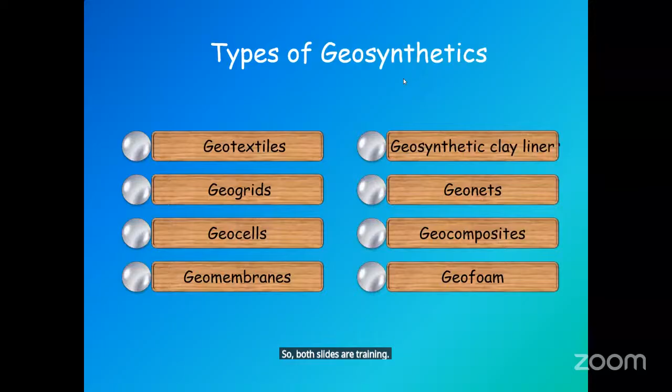Good evening, sir. Good evening, Andy. We'll start by 6 o'clock, sir. Okay, sir.

So how many are attending, sir? Total 316, sir. Out of that, I think around 250 to 275 are expecting to join, sir. That is a very good number, sir. So getting those many participants, yeah, from around 185 colleges, they joined, sir. Oh, very good.

Good evening, sir. A warm welcome to day 5 of our FDP. We are excited to continue our enriching journey with all of you. I, Ms. B. Ramya, Assistant Professor, it gives me immense pleasure to welcome you all to the day 5, session 1 of our AICTE ATAL Faculty Development Program on Sustainable Practices and Innovative Trends in Civil Engineering. We extend a warm welcome to all our resource persons and participants joining us today from various institutions across the country. We look forward to an engaging day ahead with esteemed speakers and insightful topics.

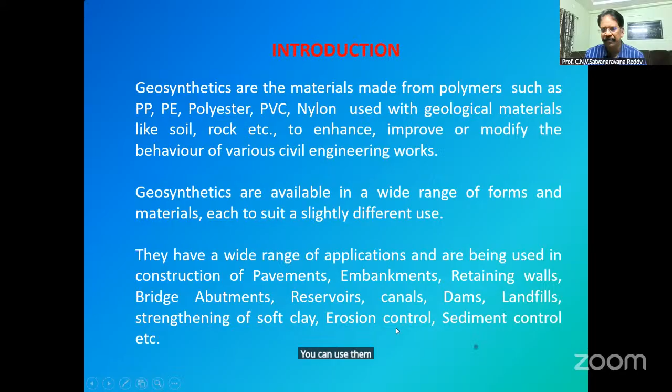You can use them for erosion control, sediment control, etc. In this slide, you can see different types of geosynthetics: geotextiles, geogrids, geocells, geomembranes, geonets, and geocomposites.

In fact, geosynthetic clay liner will also be categorized as one of the geocomposite materials. The only difference is that other geocomposites will have a combination of two different geosynthetic materials, whereas in case of geosynthetic clay liner, you will have bentonite packed in between geotextiles. Okay, so geonets and geofoam.

So first I'll start with geotextile. These geotextiles are flexible, permeable fabrics made of polymers, which can perform the functions of separation, filtration, reinforcement, and drainage.

So these geotextiles are porous and they allow for both in-plane and cross-plane permeability. They allow seepage of water along its plane as well as across its plane, so they are useful for serving as drain and filter based on this ability. Among the various geosynthetics, geotextile is the most widely used geosynthetic material.

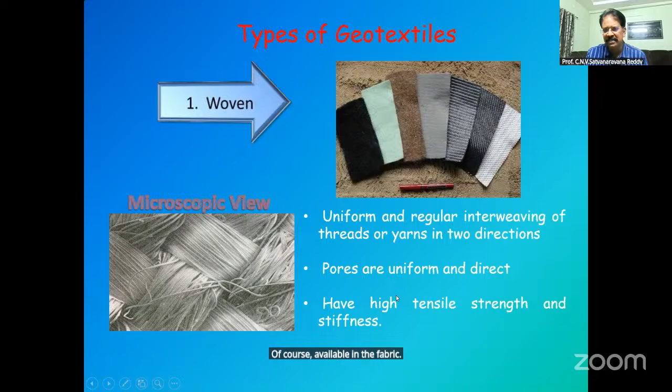Coming to geotextiles, you can categorize them as woven geotextiles and non-woven geotextiles. Woven geotextile is manufactured by the conventional method of weaving. In microscopic view, you can see the weaving pattern - you will have uniform pores, and pores are direct. If you hold the fabric against light, you can directly see the pores available in the fabric. These woven geotextiles have high tensile strength and stiffness compared to non-wovens.

So non-woven geotextile, as the name indicates, is manufactured by methods other than weaving. They are manufactured by heat bonding, resin bonding, or needle punching of a bunch of synthetic filaments or yarns. You don't see any visible thread pattern. The microscopic view appears like this.

These non-woven geotextiles are thicker and have irregular pores. They have low tensile strength and low stiffness, so they are not preferred as reinforcement. You can use them as separators, drain and filter. Whereas the woven geotextile, you can use as reinforcement besides having the functions of separation, filtration, and drainage.

So the next type of geosynthetic material is geogrid. Geogrid is a synthetic material manufactured using high density polyethylene. The HDPE sheet will be punched, holes will be punched into the sheet, and then the sheet will be stretched in two directions so as to produce a geogrid with apertures of this pattern, a square pattern.

This type of geogrid is called biaxial geogrid. If the apertures show more elongation in one direction and less in the other, you call it uniaxial geogrid. You will have high tensile strength in the direction of the longer dimension of the aperture. In the transverse direction, the strength will be minimum. Particularly when you use geogrid to reinforce soil supporting a retaining wall, you will go for uniaxial geogrid.

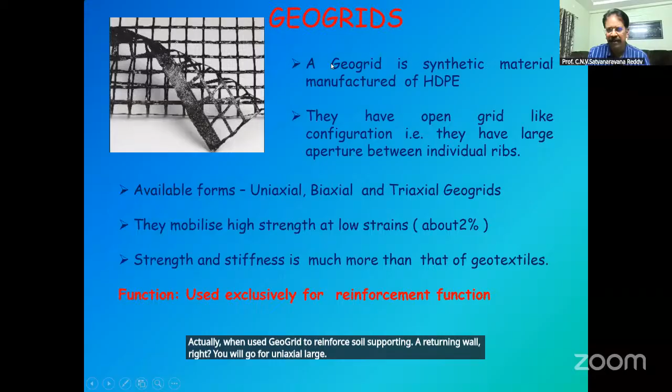Below footings, you will go for usage of biaxial geogrid. So anyway, besides uniaxial and biaxial, you also have triaxial geogrids. I'll tell you what triaxial is.

The characteristic feature of geogrid is that they mobilize their tensile strengths at very low strains, so they are much stiffer compared to even woven geotextiles. The main function of geogrids is reinforcement. It cannot serve as a separator because you have large apertures. It cannot serve as filter and drain. The only function for which we use it is the reinforcing function.

So this is the picture of uniaxial geogrid. Whenever you see apertures with more elongation in one direction and lesser in the other, it means it is designed to provide high tensile strength in one direction. The other direction will have nominal tensile strength. That is uniaxial. Biaxial, in both directions, possesses the design tensile strength. Coming to triaxial geogrid...

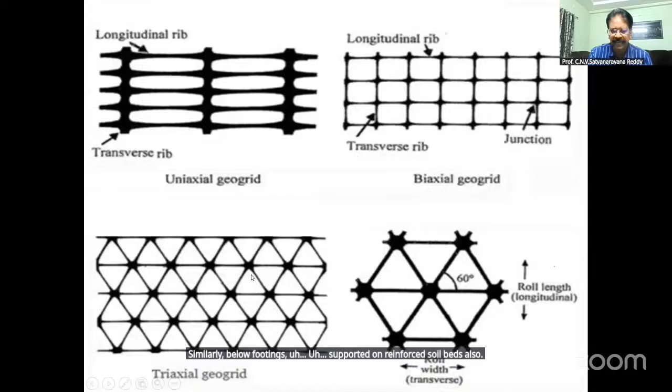So the apertures are triangular in pattern. Compared to biaxial geogrid, triaxial geogrid can mobilize tensile strength more effectively. So whenever you want to use geogrid for basal reinforcement for supporting embankments on soils of low shear strength, you can think of using triaxial geogrid. Similarly, below footings supported on reinforced soil beds, you can prefer using triaxial geogrid compared to biaxial geogrid for more effectiveness.

So I can see from here, uniaxial geogrid is a unidirectional structure with one-way stretch that provides strength in one direction only. Coming to biaxial geogrid, you have ribs that provide tensile strength in two perpendicular, orthogonal directions. One direction is named the machine direction and the other the transverse direction — MD and TD, as mentioned in the specification of geogrids. Coming to triaxial geogrids, you have ribs oriented in three equilateral directions, offering more uniform tensile strength distribution across the grid.

Coming to biaxial geogrid, they will be preferred in embankment and road constructions. Coming to triaxial, for soil stabilization in construction of heavy duty pavements, and for laying pavements on soft ground or filled up ground, you prefer triaxial geogrid.

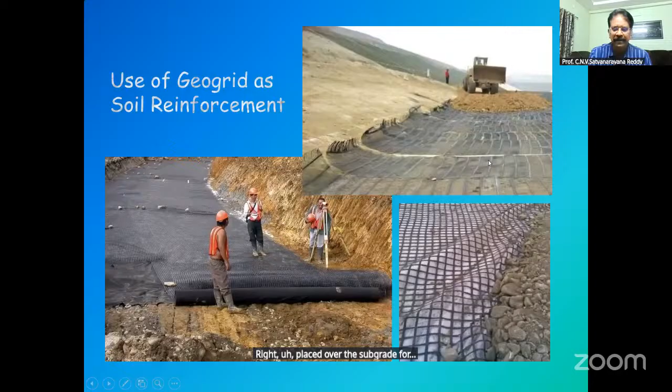So here you can see a picture of geogrid placed over the subgrade for construction of a pavement. You can use geogrid either at subgrade level between subgrade and subbase, or within the subbase at the interface of subbase and base course. When you provide geogrid, it restrains lateral movement of the aggregate in your subbase material. So when it restrains the material from lateral strains, its ability to support load will increase.

These are planar products. These materials consist of ribs in two directions. If you look at aperture size, it is diamond shaped. Thickness of geonet is much more than that of geogrids.

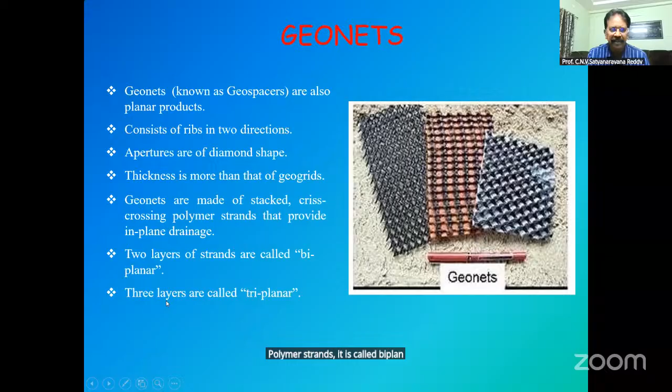These geonets are made of stacked crisscrossing polymer strands which provide in-plane drainage. The main feature of geonet is to provide in-plane drainage. They allow water to flow along their plane. If a geonet consists of two layers of polymer strands, it is called biplanar geonet. If it contains three layers, it is called triplanar geonet.

Don't think geonets are only used to prevent erosion on steeper slopes of embankments. You can also place them within backfills and embankment material to help dissipation of pore water pressure, that is, to drain out water during the monsoon period. The main purpose of geonet is the drainage function. Unlike geogrids, they cannot serve as a reinforcing material; they are meant for drainage application.

Wherever you are thinking of providing a material around drains and drain pipes, you will use graded sand. If graded sand is not available, you can manage using this geonet wrapping around the drain pipe. So you can use it to replace the traditional drainage layers.

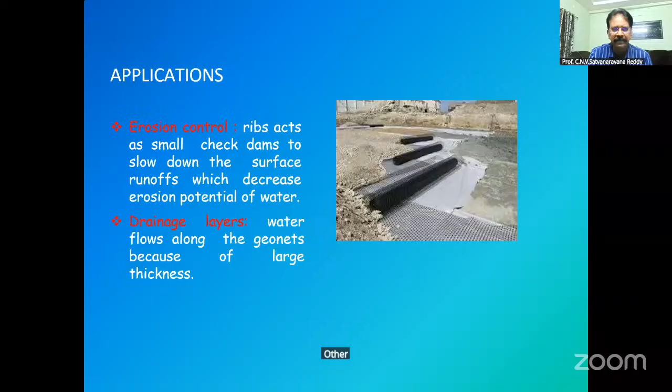Coming to the other type of geosynthetic material, geomembrane, it is an impervious synthetic fabric made from high density polyethylene. We generally call it HDPE membrane. These fabrics are used to control fluid or gas flow.

Suppose you are going for construction of a new canal. Generally lining for canal will be provided in areas where there is presence of highly pervious soil. Even otherwise, these days we prefer lined canals to minimize seepage and allow flow of water at a relatively higher speed. In such a case, instead of going for cement concrete lining, you can simply use these geomembranes. You can place membranes along the sides and bed of the canal to prevent seepage of water into the underground.

These geomembranes are available in varying thicknesses, as low as 0.5 mm to 3 mm thickness. As mentioned, you can use them as liners in canals and also landfill systems. Wherever you dump waste material, whether hazardous or non-hazardous, you will provide a base lining system so as to prevent leachate from seeping into the underground and polluting underground soil and water. There also you can use geomembranes. I'll show in the next slide how it will be used in a landfill system. You can also use geomembranes as damp-proof courses in floors and roofs.

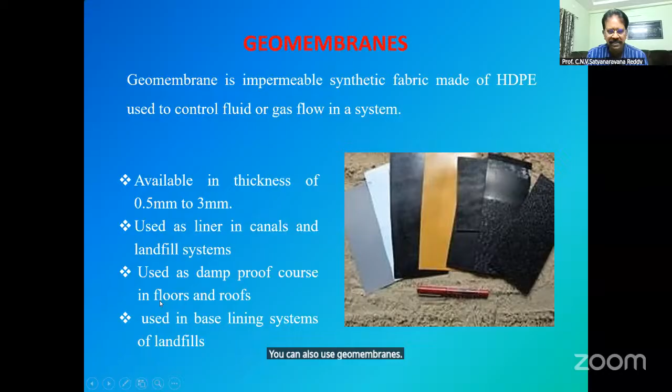If you see a membrane in black color, understand that it is coated with black carbon. Such material, even if exposed to sunlight, does not decay under ultraviolet rays. As long as any synthetic material is provided below the ground surface, not directly exposed to sunlight, no black carbon treatment is required. In any application, if your material is likely to be exposed to sunlight, you need to use black carbon coated ones. So if you see the engineered landfill containing municipal solid waste or any non-hazardous waste material, it will consist of a single composite liner system.

Before dumping waste, on the existing subgrade you will place compacted clay of 450 to 600 mm thickness, and above that you will keep HDPE geomembrane of minimum 2 mm thickness. Above that you will keep a non-woven geotextile as a cushion over the membrane, and above that you will place drainage material, graded sand, in which you will provide perforated pipes for collection of leachate.

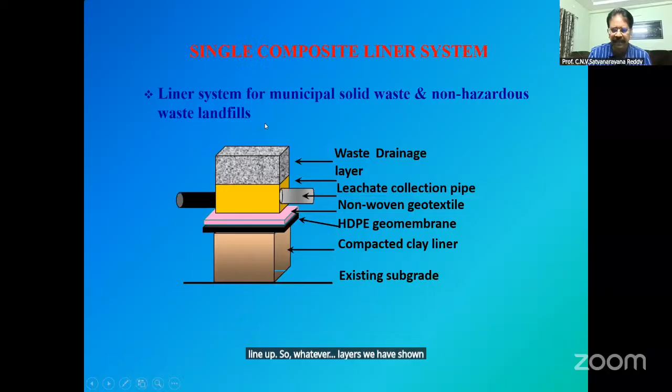If it is a landfill meant for storing hazardous waste, such as some industrial waste found hazardous, in such a case you will provide a double composite liner. Whatever layers we have shown in the single composite liner, we repeat them, providing a double composite liner system. Even if the layers in the first liner fail, the second liner will be there to prevent leachate entry into the underground. So that is the only difference, and I don't want to discuss it much more.

Keep in mind that geosynthetics are used in the base lining system of engineered landfills. Here, not only is the geomembrane used, but along with it, for cushioning, a non-woven geotextile is used.

Similarly, when waste is contained, it is contained by forming a bund all around the facility. On the inside slope of the bund, can you place the single composite or double composite liner system I have shown, with clay placed on the slope and compacted properly? That's difficult. At the base, you can do it, but on the inner slope of the bund, you need to provide an alternate material to the compacted clay liner.

As an alternative to compacted clay, we use GCL, the geosynthetic clay liner, wherein bentonite powder is packed between two geotextiles. This is simply placed on the inner slope of the bund, and the rest of the layers remain as they are, with clay replaced by GCL. So GCL performs the same function as compacted clay.

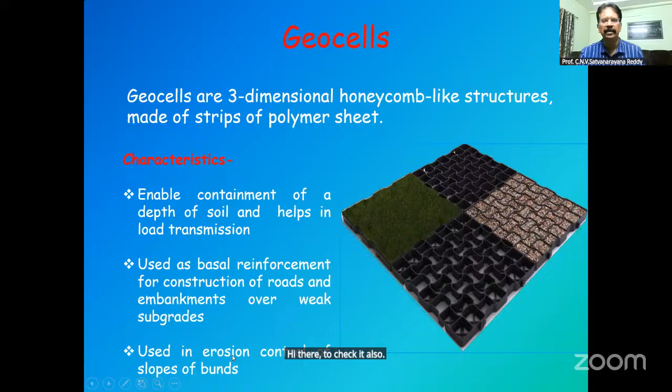The other geosynthetic material is geofoam. Most of you are exposed to foam concrete, the advantage of which is being lightweight. Similarly, geofoam is manufactured into large lightweight blocks by a polymeric expansion process, so you have geofoam blocks. The reason for the lightweightedness of this geofoam material is that it has voids in the material which are filled with gas.

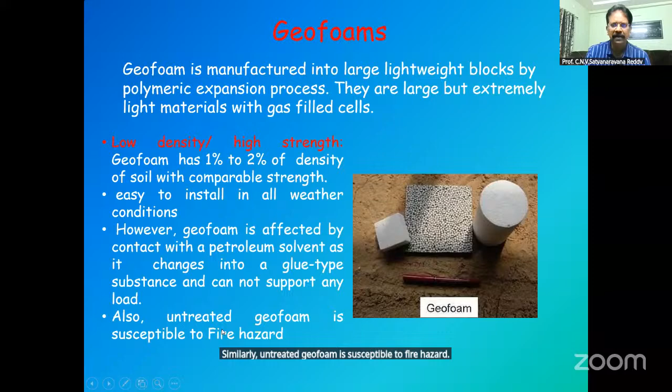So the blocks prepared from geofoam can be used for construction of lightweight embankments on weak soils. Similarly, in preparation of subgrade for pavements where the top layer of soil is comprised of soft clay. You can also use geofoam material as backfill behind retaining walls to reduce lateral thrust on the retaining walls.

So geocomposites, as I told you, are combinations of two different kinds of geosynthetics to get the advantages of each material. You can see usage of geotextile with geonet together, geotextile with geomembrane together as seen in landfills, and geotextile with geogrid together.

If you want a reinforcing material of high strength to be used on clay subgrade for laying railway track or highway, geogrid alone cannot serve as a separator, so it allows intermixing of subbase material and subgrade, or in case of railway track, ballast gets mixed with subgrade. To prevent that, if you place geogrid with geotextile together, it will prevent intermixing of overlying and underlying material.

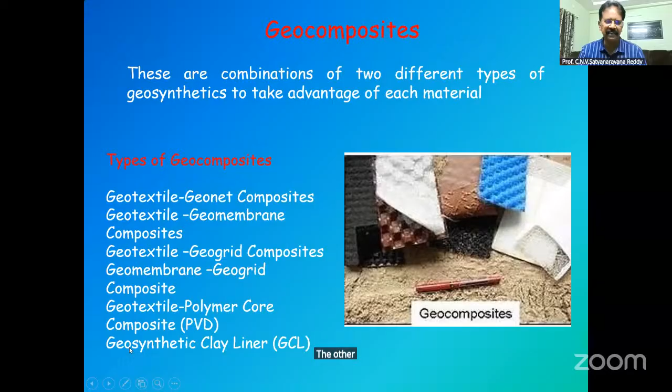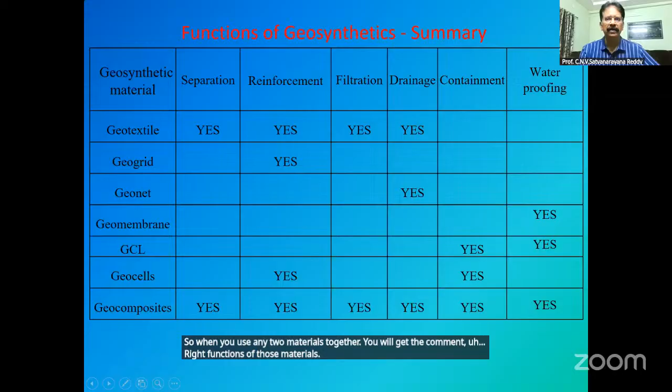So looking at the advantages of geosynthetics: they are cheaper, easy to transport, and installation is easy. You can design them for a given application. Installation can be done quickly without the necessity of skilled labor. They are consistent over a wide range of soils.

There are space savings too. If you go for conventional construction, it may require more space. With geosynthetics, you can construct the same facility with smaller space requirement. I'll show this when we discuss reinforced embankments.

Material quality control: these materials are more homogeneous because they are machine-made, factory-made. Compared to natural materials, they are more homogeneous, so better quality control can be exercised at the site.

Easy material deployment: they are less environmentally sensitive and don't cause any pollution to the subsoil when placed embedded in soil. They have improved performance, are durable, and can last long unless exposed to ultraviolet rays of sunlight.

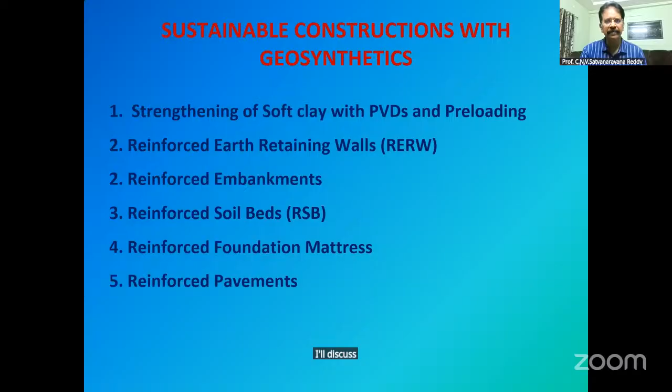Suppose I have a soft clay deposit and I want to construct a facility there. For example, you can take Visakhapatnam airport. There you have thick deposits of soft clay extending to 14 to 18 meter depth. At present, expansion work for parallel taxiways is going on.

So there you cannot directly go for laying your taxiway pavement because the N values of existing clay are as low as 1, 2, 3. And hardly we'll see a value of N equal to 6 or 8 at 10 to 12 meter depth. At some places, even up to 16, 18 meter, N values are only 3 and 4. So without strengthening such soft clay, you cannot lay your pavement there.

Earlier also, for the runway, strengthening of soft clay was done using PVDs and application of preload. So without improving drainage conditions over the existing soft clay, if I place a preload simulating the loading from my proposed structure, will it be of any use?

No doubt pore water pressure will increase, but for dissipating excess pore water pressure, water has to travel either in the upward direction or downward direction depending upon availability of drainage space. So it is as good as constructing your structure directly.

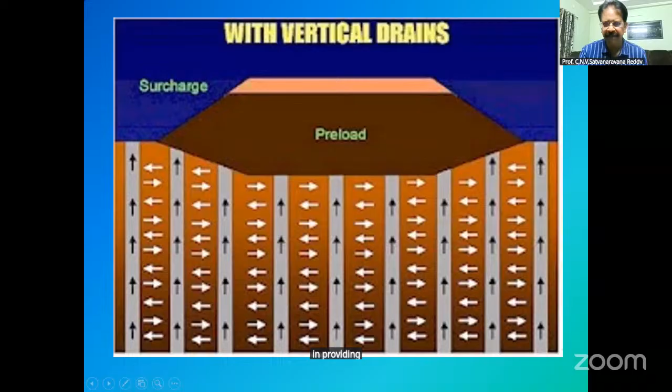Without drains, if you provide preload, it takes several years for completion of consolidation. If you provide only drains without any surcharge, only the water in the immediate neighborhood may get drained out, so it also cannot achieve consolidation.

If you provide drains and place preload in stages, you can complete consolidation in a period of 6 to 9 months. After that, you can lay your runway or taxiway, or construct light to moderate structures using shallow foundations, even where the soil is otherwise too soft to walk on, by strengthening it using these PVDs with application of preload.

So this is how a PVD looks. This prefabricated vertical drain comprises an inner core made of high quality flexible polypropylene with water channels. These corrugations are channels which help once water enters inside this drain. Water gets drained along these channels and discharged into the surface sand blanket which you provide before placing preload.

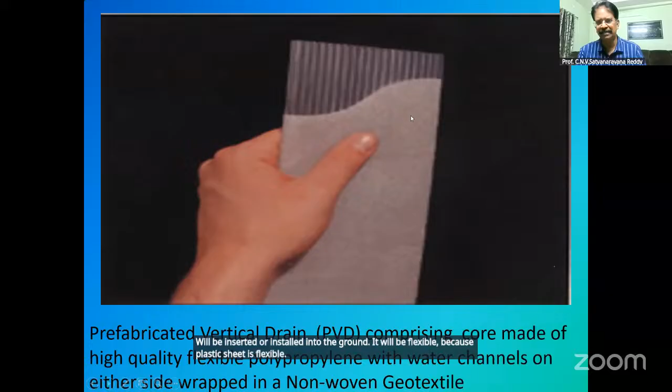It will be flexible because the plastic sheet is flexible, and the non-woven geotextile is flexible too. It appears like a winter cloth or rug you use to protect from cold temperatures. If you hold it against light, you will not see any direct pores, but if you pour water on one side, it comes through the other side - meaning it is porous.

The purpose of wrapping non-woven geotextile around the core is to serve as a filter. When water from neighboring soil enters, all fines will be blocked and only water will be allowed to enter inside, and that water flows along these channels.

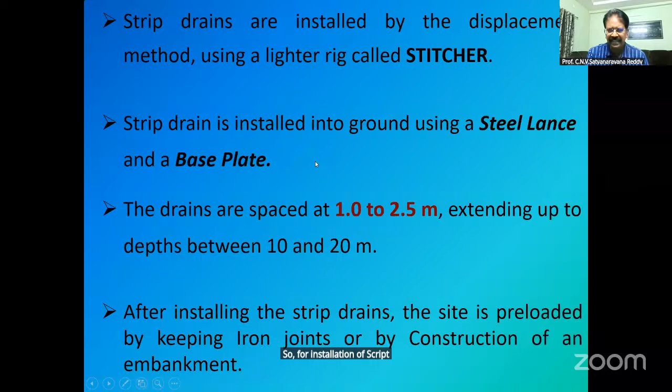For installation of these strip drains, you use a lighter rig called a stitcher. You make use of a steel lance and base plate. The steel lance is a hollow steel section having cross section slightly bigger than the cross section of your PVD. Length of the steel lance shall be equal to the depth up to which you want to install the PVD.

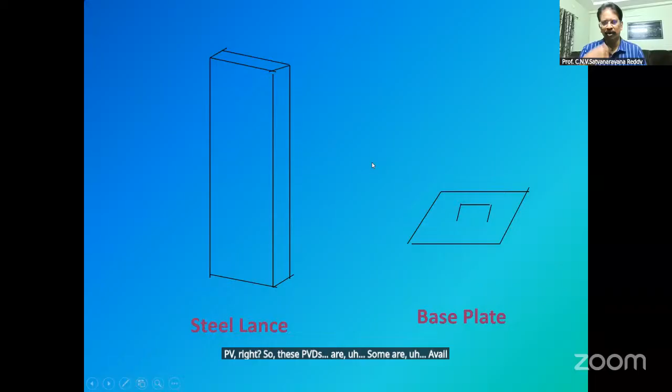These PVDs are available in the form of rolls, just like ribbon rolls you see in marriage halls. These strip drains will be available in the form of rolls. You insert one end of the strip drain from the top cross section of the steel lance and push it till it comes out from the bottom. When it comes from the bottom cross section of the steel lance, there you place the base plate with a central hook.

You insert the strip drain through this hook and fold it back and staple it. When you hold the strip drain at the top, this base plate will close the bottom of the steel lance.

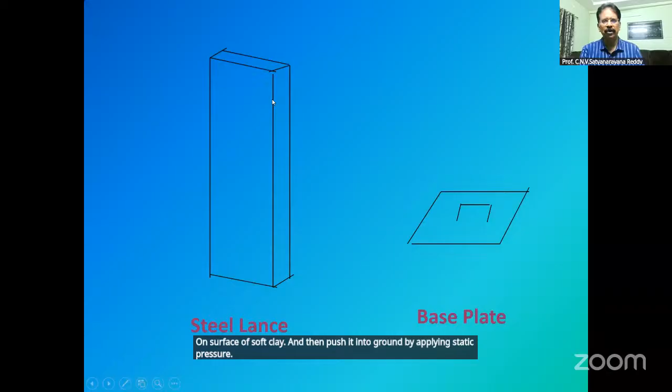You place the base plate with steel lance and strip drain inside on the surface of soft clay and push it into the ground by applying static pressure. The strip drain gets unrolled from the roll, and the steel lance along with base plate with strip drain inside penetrates into the ground. After having pushed the steel lance up to the required depth...

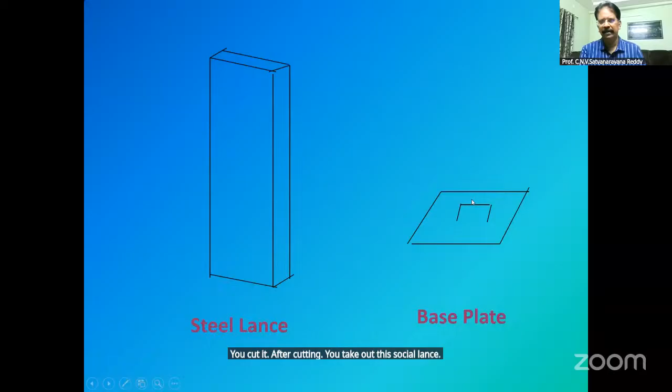Leaving a little portion of strip drain above, because you need to embed that into the sand blanket, you cut it. After cutting, you take out the steel lance. The base plate remains inside the ground - you cannot retrieve it. That is how these strip drains, PVDs, are installed.

You can see here - this is the base plate with central hook. This is the strip, your PVD. It is taken through the central hook, folded back and stapled. This is the steel lance which you are seeing.

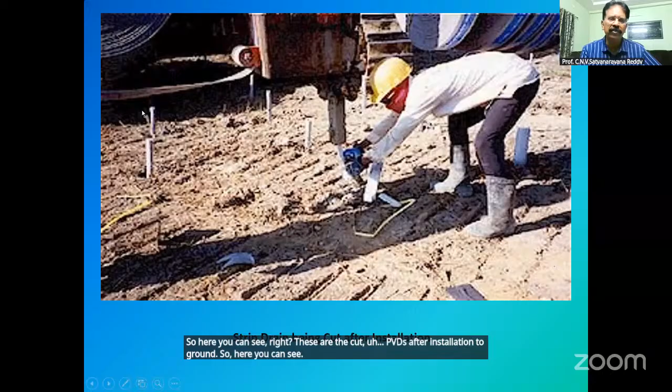So here you can see the cut PVDs after installation into the ground, and here a roll from which PVD is being installed at another location. All those heads of PVDs will be embedded in the sand blanket, and you will place preload.

Preload is simply dumping some gravelly soil in the form of an embankment in stages. Suppose I want to bring the safe bearing capacity of my ground to 10 ton per meter square. You need to stack gravelly soil to a height of 5 meters, because the density of gravel or morum soil is 2 ton per meter cube.

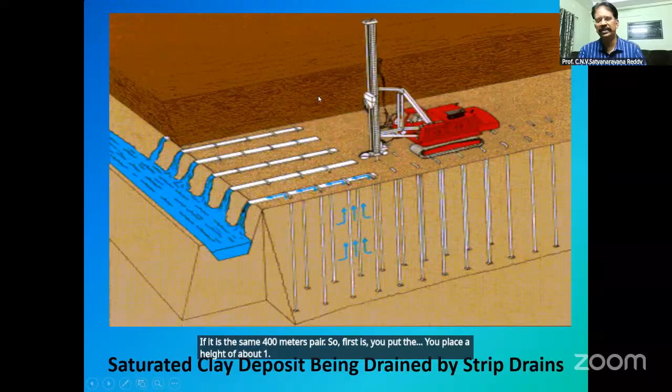So don't put 5 meters at once. You estimate the ultimate bearing capacity of soft clay. If it is say 4 ton per meter square, then in the first stage you place morum to a height of about 1.5 meters, so that induced stress is 3 ton per meter square, which does not cause any shear failure.

Once it gets consolidated, when no further settlement of preload is seen, or you insert piezometers and check pore water pressure, if excess pore water pressure is completely dissipated, then you place another 1.5 meters of soil. Like that, in stages, you apply preload and achieve consolidation of clay under the applied preload intensity.

For construction of your actual structure, what you will do is remove the placed preload and immediately take up your construction.

So without going for this method, if I want to lay a runway where soft clay is present to deeper depth, I should construct a bridge there to support the runway by adopting piles and terminating them in rock strata. Whereas by consolidating the existing soft clay layer, I am able to go for a conventional flexible runway, with conventional sub-base, base layers and bituminous surfacing.

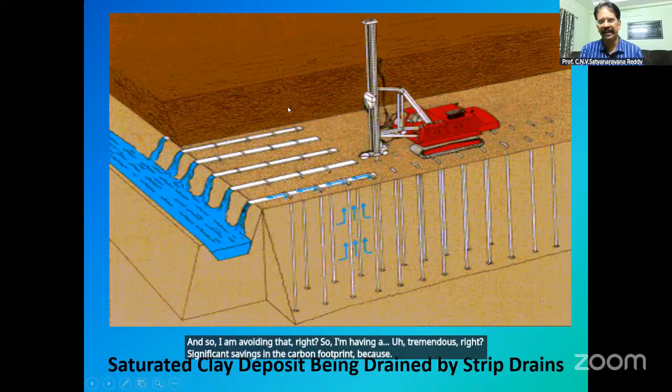So if I were going for a cement concrete runway supported on pile foundation, how much volume of concrete and amount of steel would be required? I am avoiding that. So I am having tremendous, significant savings in carbon footprint, because I am avoiding usage of concrete and steel here. So this is one sustainable practice.

The other application, which majority of you might have seen, is reinforced retaining walls. Wherever you see construction of a flyover, in the approach of the flyover, you see construction of this reinforced retaining wall. When you walk by the side of a constructed flyover, you will see beautifully assembled precast concrete members. They are called fascia panels.

So the fascia wall is constructed using precast concrete panels. They are placed one by the side of the other, one above the other. By interlocking, the wall is formed. And before constructing that fascia wall, you simply put a bed concrete, which we call a leveling pad. No special foundation is required.

Simply place the leveling pad, bed concrete, and above that you start placing your fascia panel members. On the back of the fascia panel members, there will be arrangement for attaching the reinforcing material. It can be high stiffness geotextile, or in majority of cases you will see uniaxial geogrids.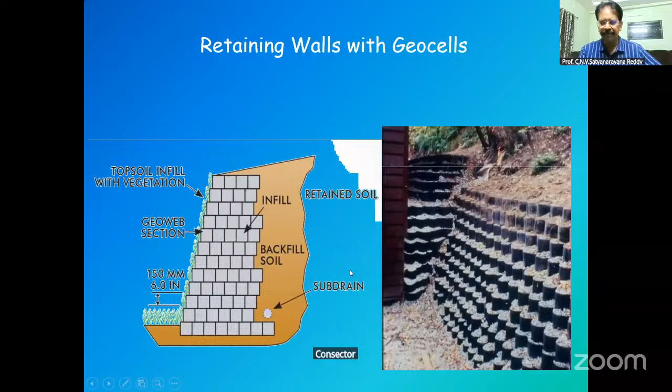So you can see some pictures of retaining walls. Even geocells with infill can be placed one above the other to construct a retaining wall. This type of retaining wall you are seeing opposite Sivarama Sweets in Visakhapatnam. Almost in every town and city, present day, wherever flyover construction is going on, they are going for construction of retaining walls in approaches using reinforced technology.

So different types of fascia panels, to improve aesthetic appearance, have come into use. Even single panel fascia is also available.

Most of you might have gone to Vijayawada Kanakadurga temple. There, for widening the existing Ghat road, they have constructed a two-tier reinforced retaining wall in 2008. The maximum height of constructed wall was 22.5 meters. Even now, if you have not paid attention, if you go, just have a watch on this constructed reinforced retaining wall.

So whatever advantages I have mentioned, they are here. They take less time for construction, simple to construct, cost effective. You can use industrial byproducts as fill material. Being flexible, they sustain seismic loading.

One more advantage is, if I want to construct a conventional retaining wall of say 6 or 8 meter high, the required bearing capacity of soil will be more than 30 ton per meter square. Whereas for this reinforced earth retaining wall, the required safe bearing capacity of soil will be around 20 to 22 ton per meter square. That means soils with relatively lower bearing capacity will be sufficient for constructing a retaining wall of given height. Compared to conventional walls, the requirement of bearing capacity of soil for RE wall is less.

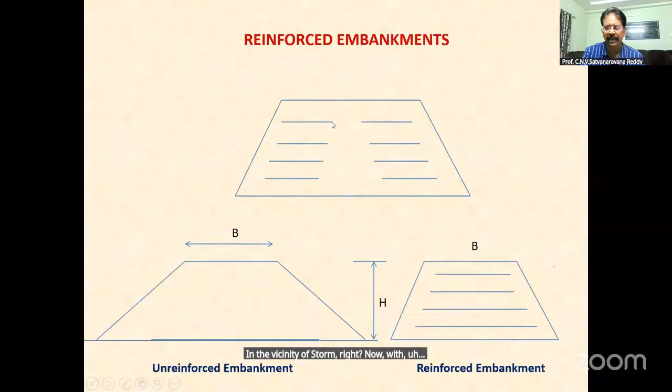Now, with the present day developments in reinforced earth area, we are going for construction of reinforced embankments. You can provide reinforcement in layers in the vicinity of slope region, and thereby not only can you steepen the slope, but also have increased load carrying capacity, because the reinforcing layers will prevent movement of soil in the outward direction under the placed load.

When loads are applied by the moving vehicles, tensile strains will be developed in the outward direction. So the outward movement tendency is prevented by the placed reinforcement layers by way of its interaction with soil through friction and adhesion. So you can see here, these two figures I have shown here to explain the benefit of placing reinforcement. In both the cases, top width of embankment is same, height of embankment is same.

In the unreinforced case, the required base width is very large. By provision of reinforcement, the required base width can be reduced drastically. Particularly in urban areas where there is restriction on space, you cannot go for unreinforced embankments. Similarly, when you expand highways or railways, some area with construction may already be there, so you may not go beyond a certain line. In such cases also you can think of this.

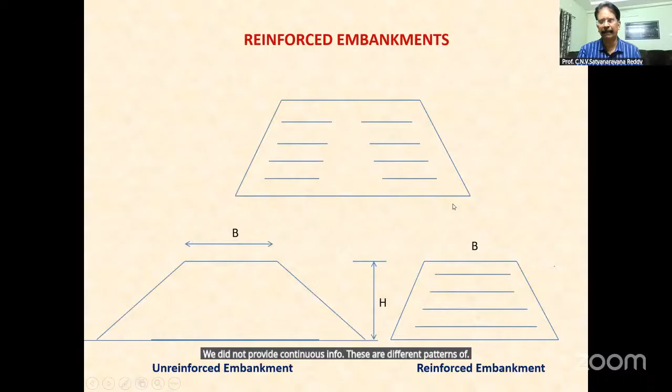If the width is more, then you can provide reinforcement only in the slope regions; you need not provide continuous reinforcement. These are different patterns of placing reinforcement in embankments. Whatever I have explained, I have put here. So they require less base width for a given height of embankment.

Next, enable usage of marginal materials in highway embankment construction. Let's say I have some materials with poor drainage conditions which do not meet the specification for building an embankment. In such a case, by placing geocomposites within such marginal materials, I can improve drainage conditions in the soil and make them suitable for use in embankment construction. For example, any granular material, can I use it in embankment construction?

No. You need to have some bonding between the particles, otherwise it will not be stable. By using geotextile sheets, I can even use a cohesionless material like sand, even fine sand. I can place a geotextile, place a certain thickness of sand, fold the geotextile back, place another geotextile, put some more layer of sand, wrap the geotextile back into the material like that. So by doing this wrapping technique, I am able to use even cohesionless material in embankment construction. So you need to properly design the wrap-back length of geotextile.

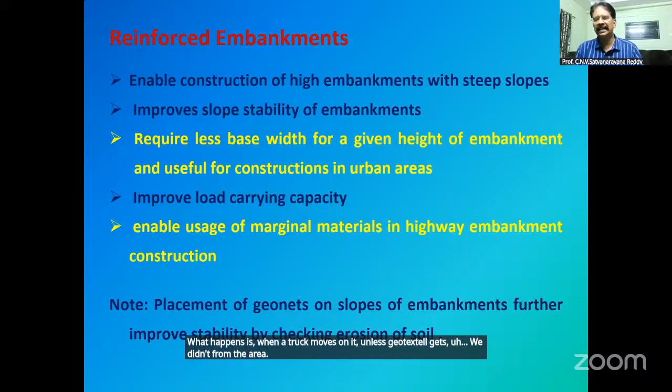Under load, it should not get pulled out. So keep in mind that the soil on which you cannot walk, there you can take your earth moving equipment, any crane, any truck, by simply spreading a layer of some granular material and placing geotextile over a larger area. What happens is when a truck moves on it, unless the geotextile gets pulled in from the area, localized punching under the load cannot happen.

So in the majority of construction sites where the top soil is slushy, they generally put some 2 to 3 inch thick crushed dust or sand, and above that they place a sheet of geotextile, and then they allow the construction equipment to move on.

Not only can you think of geosynthetic material in the form of geogrid or geocomposite, a combination of textile and geogrid as reinforcement, but also on steeper side slopes, if you place geonets, they will protect it from erosion of soil from the steep slope. So that also you can think about.

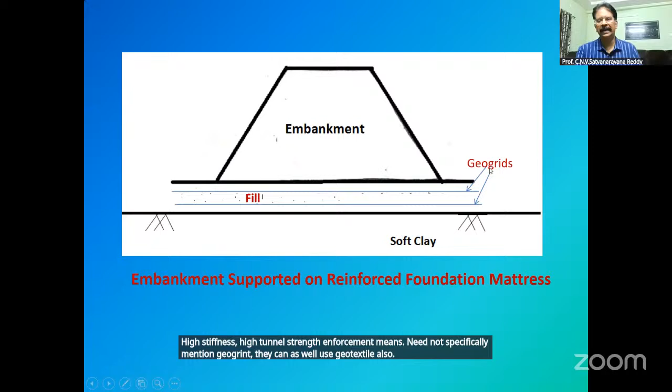Now matching the stiffness and strength of geogrid, even geotextiles are being manufactured. Such high stiffness, high strength geotextiles were recently used in our Visakhapatnam airport runway expansion work. So present day, high stiffness, high tensile strength reinforcement need not specifically mean geogrid - you can as well use geotextile. But their production is not as much as geogrid, so maybe after 5-10 years, you will see such geotextiles dominating over geogrids.

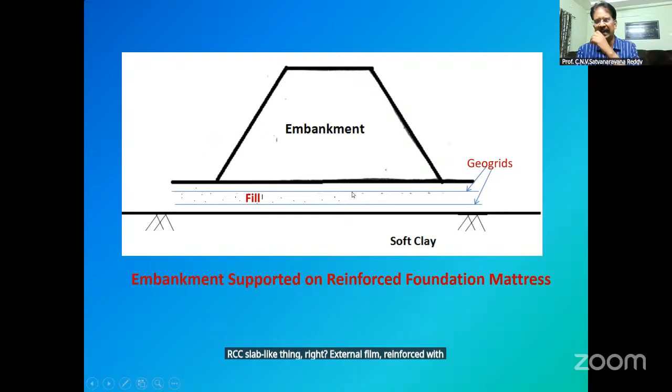For the time being, geogrids are being widely used due to their popularity in terms of high stiffness and high tensile strength. So this reinforced foundation mattress will serve as a stiffening layer - think of it like an RCC slab, frictional fill reinforced with two layers of high stiffness, high tensile strength geogrids.

Over this, if I place an embankment, in the central portion the intensity of load transfer will be more, and as you move towards its toes, pressure will go on decreasing - non-uniform pressure distribution will be there. Because of this provision of reinforced soil mattress, this non-uniform load, by the time it gets transferred from the bottom of the reinforced bed, becomes uniform, and the pressure is transmitted over a larger width. Thereby, the intensity of pressure transferred to the soft clay decreases.

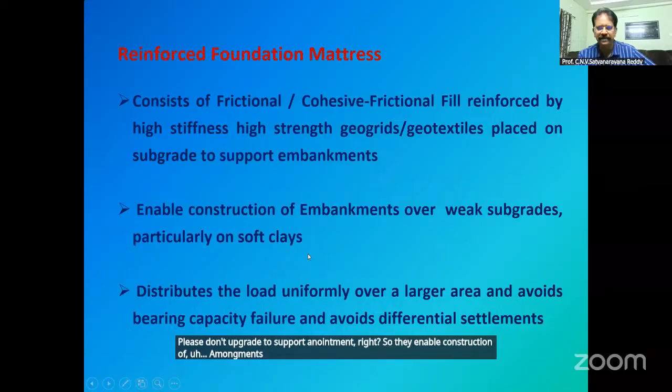So the objective of the foundation mattress is to distribute load uniformly over a larger area so as to avoid bearing capacity or shear failure and avoid differential settlements. These reinforced foundation mattresses consist of frictional or cohesive-frictional fill reinforced by high stiffness, high strength geogrids or geotextiles placed on the subgrade to support the embankment. So they enable construction of embankments over weak subgrades, particularly on soft clays.

Next, reinforced soil beds. Suppose at a place I have soft clay with undrained cohesion of say 25 to 40 kN per meter square. If you calculate safe bearing capacity using the basic theory from Indian Standard Code IS 6403, which recommends usage of the basic bearing capacity theory, it will be very low, between 3 to 5 ton per meter square. If you want to construct a G+3 or G+4 building, that bearing capacity will not be sufficient.

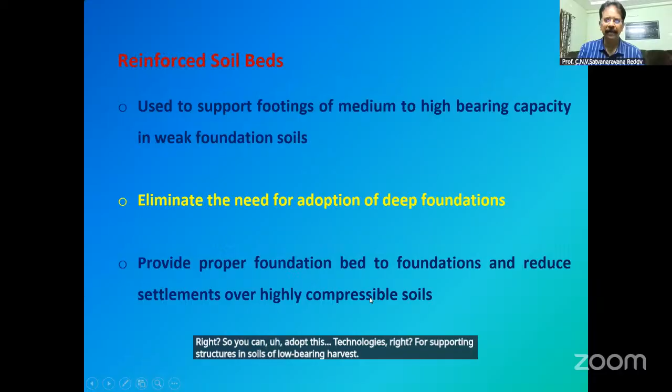So you can adopt these technologies for supporting structures in soils of low bearing capacity. So the section appears like this. Up to 1 to 1.2 times proposed size, you will replace existing soil with frictional fill reinforced with 3 to 5 layers of reinforcement.

The lateral extent to which replacement should be done shall extend generally 1.5 to 2.5 B from the footings. If you simply center and only prepare bed in the central portion, it is not sufficient. You have to extend it beyond it. So in design, all these parameters will come.

So in design of reinforced soil structure, we teach to our students in the MTech program - there are designs for it. But keep in mind that it is possible to support even a G+3 or G+4 structure in soft clay, which originally has a bearing capacity of 3 to 5 ton per meter square, by adopting this reinforced soil bed technology.

Next one is reinforced flexible pavements. Whenever you design flexible pavements, the soil parameter you look at is CBR. For expansive clays in saturated condition, if you determine soaked CBR, the value will be below 1 also - even you will see values of 0.4, 0.6.

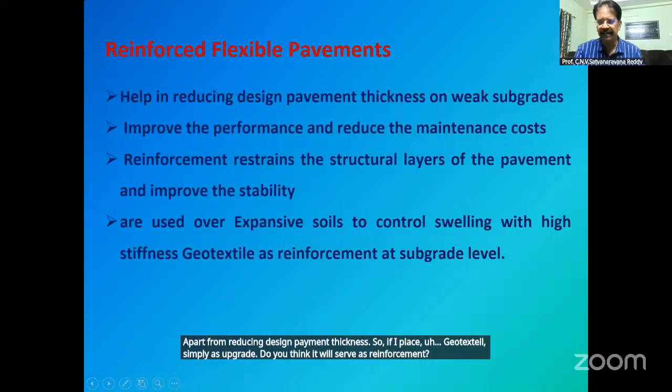So if I place geotextile simply at the subgrade, do you think it will serve as reinforcement? Simple placement does not derive its reinforcing ability. If you place geotextile, you should hold the geotextile fabric in position.

Only under load, as it gets stretched, will it derive its tensile strength. If you don't hold it by anchorage into longitudinal trenches, under applied wheel loads the geotextile simply gets pulled in and deforms according to subgrade strength. If you hold it by anchorage, it will derive its reinforcing ability. If you simply place it, it will perform like a separator, filter and drain only. For deriving reinforcement action, you need to hold it in position by anchoring into longitudinal trenches.

Having been exposed to the potential of geosynthetic materials in sustainable constructions, you may have some doubt: what will be the lifespan of these geosynthetic materials, or which type of geosynthetic is durable? As I mentioned, geosynthetics are available in the market made from different polymers, so which polymer-based geosynthetic material is durable is something you should know.

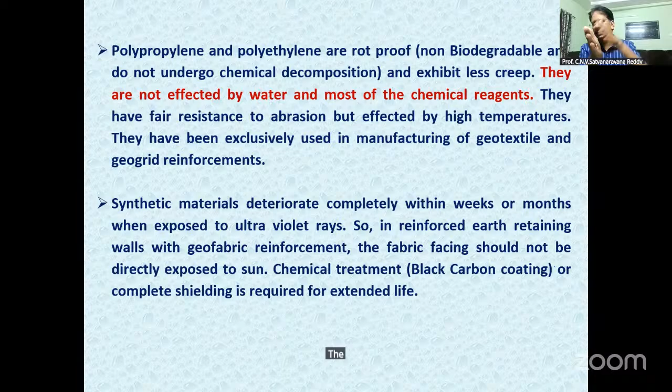Any synthetic material, irrespective of whether it is polypropylene, nylon, polyester, whatever it is, completely deteriorates within weeks or months when exposed to ultraviolet rays. So suppose in construction of a reinforced retaining wall you are using a geotextile sheet as reinforcement, the geotextile sheet will be wrapped back into the fill to serve as facing, and no separate fascia wall will be constructed. In such a case, the wrapped portion of geotextile is exposed to sunlight. Then you have to use black carbon coated geotextiles. That's only what you should keep in mind.

That's it I have. I don't want to conclude because I have discussed many aspects. I hope I have brought out the things in a clear manner. Still, if you have any doubts, you are free to ask.

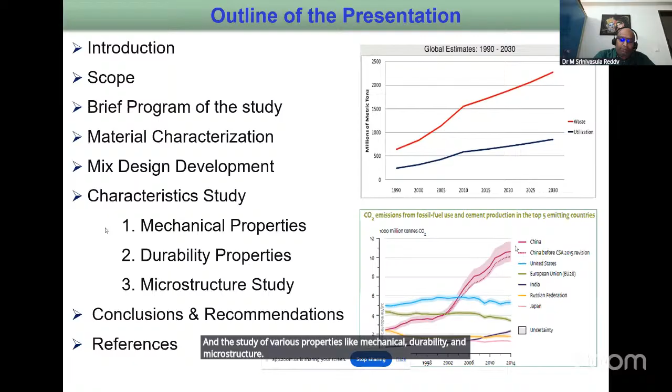Today we'll discuss the development part, and after that, the performance evaluation of the developed geopolymer concrete using the mix design that we developed in our laboratory. So this is how my presentation goes: introduction about the present topic, scope, the experimental program, material characterization, the various materials used in this study, the mix design development, which is the main core of this research, and the study of various properties like mechanical, durability, and microstructure, and finally my conclusions on the research.

Okay, so this is not a new topic. So many years people are working on geopolymer concrete. So many people are using many different waste materials, and like that, I also started my research trying with different waste materials. So in my research, I mostly concentrated on using three waste materials: fly ash, blast furnace iron slag, and red mud. So I don't need to explain much about fly ash and slag.

This fly ash we generally get from thermal power stations where coal is used as a fuel for burning, and the iron slag you get from the iron industries. Then red mud, this we generally get from the aluminum industry. It is a byproduct of bauxite ore. You can see here the picture shows why they named it red mud - it looks like mud which is red in color, because mainly this red color is due to the presence of a large amount of iron oxide in the material composition.

Using these three materials, I tried to develop a mix design, and I think most of you know about mix design. Many different researchers propose different mix designs. Prior to starting my research on this, I found many are using only trial and error method, like by considering 70% aggregate and 30% as a binder material. So likewise, in this percentage wise, it's like trial and error. They are not considering any properties of the material used, the specific gravity or physical properties or chemical properties.

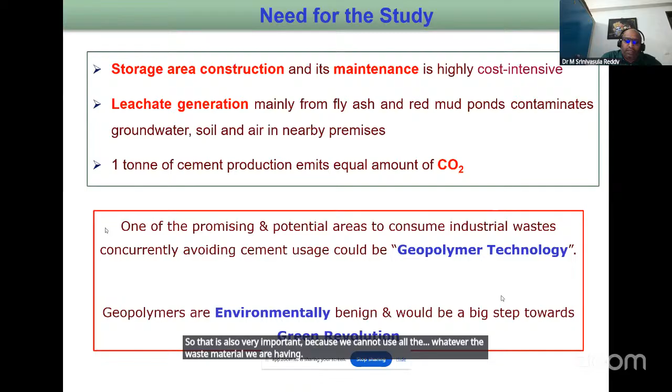Generally, what type of industrial waste is suitable for geopolymer? That is also very important, because we cannot use all the waste material we are having - there will be some logic behind that, so that also we'll discuss.

So it's a general definition: it's a green concrete that does not depend on the presence of Portland cement as a binder. Instead, it requires activation of source materials rich in silicates and aluminates using an alkali activator solution. We generally use sodium or potassium hydroxide, or sodium or potassium silicate as the alkali activator.

So these are the cubes which I developed using various industrial waste. The first one is purely fly ash, and this one is the combination of fly ash, red mud, and GGBS. The third one is fly ash and GGBS. So these are three different types of composition: one with fly ash alone, one with fly ash and slag (GGBS), and the other with fly ash, GGBS, and red mud.

You can see the red mud here - I used only 20%, but you see the color even with just 20%. The binder itself is roughly 35% of the mix, so out of that 35%, 20% means only about 7% is red mud, but it gives a beautiful color because of the large amount of iron oxides present in that red mud. Okay, I'm going fast - is the pace okay?

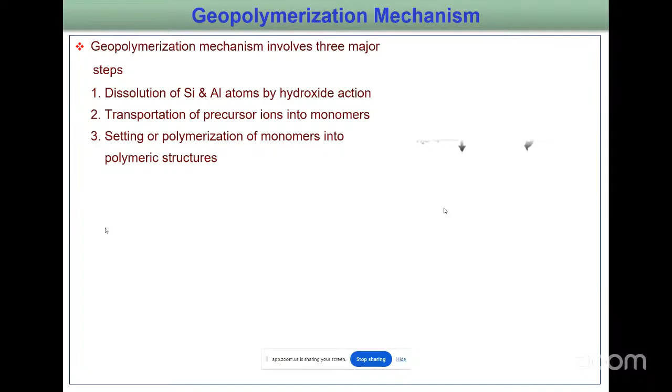This geopolymerization mechanism, which is the main reason for the strength attainment of geopolymer concrete, consists of three major steps. First is the dissolution of silica and aluminum atoms by hydroxide ions from the raw materials. Then transportation of these - we call them precursor ions - the silica and aluminum ions along with the hydroxyl OH-minus ions.

I'm not going deep into that mechanism - this is how it forms: dissolution, then the presence of hydroxyl ions, then reorientation takes place, and finally polymerization and hardening. And here we can see the final product - these are the individual components, and they all gel together to form a final product like sodium polysialate disiloxo.

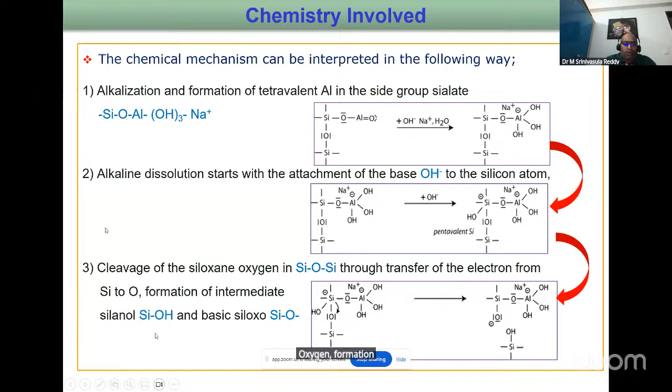After this, alkaline dissolution starts with the attachment of the base OH to the silicon atoms and sodium hydroxide to the aluminum atom. So cleavage of siloxane oxygen, that is SiOSi, through transfer of the electron from Si to oxygen, formation of intermediate silanol SiOH and basic siloxo will take place. Then further formation of silanol groups and isolation of orthosialate molecule.

This is the orthosialate molecule. Then reaction of basic siloxo, meaning SiO, with sodium and formation of sodium oxide and silica oxide and sodium terminal bond. You can see here. Finally, condensation takes place between these orthosialate molecules, reactive SiONa groups, and aluminum hydroxyl, leading to the creation of cyclotrisialate structure, this one, followed by polycondensation into sodium polysialate nepheline framework.

So this is the chemistry involved in the geopolymer. This is the final further condensation to form a chain-like structure. You can see here condensation between disiloxonate orthosialate molecules reacting SiO aluminum hydroxyl and formation of orthosialate disiloxo cyclic structure.

Yeah, most of you know the major difference between OPC and geopolymer. Only thing is the hardening process is different here, even the strength-giving components. In normal concrete, the main reaction is hydration reaction. Here the main reaction is geopolymerization.

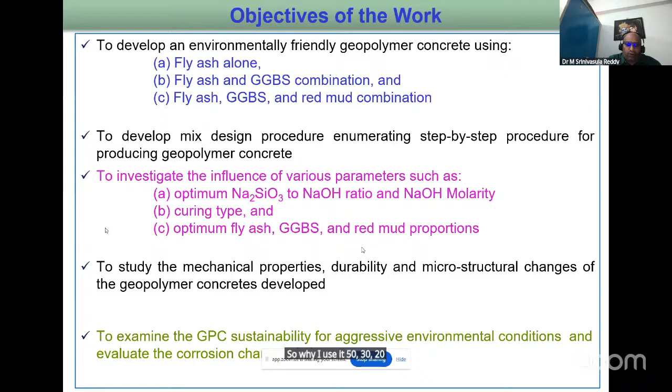So there are many factors influencing GPC. Some of the major ones I have noted here: alkaline activator type, sodium hydroxide molarity, silicate to hydroxide ratio, and sodium silicate modulus, that is Na2O to SiO2 ratio - the amount of SiO2 and Na2O present in the sodium silicate solution. Then the type of curing and temperature applied, whether oven curing or heat curing, and the optimum curing time. One more important thing is mixing sequence.

Generally, if you mix sodium hydroxide first and later add sodium silicate, the setting time will be faster. So it's better to first mix the sodium silicate and then add sodium hydroxide, so that we can increase the setting time.

Then activator solution to binder solids ratio, like water to cement ratio - here it's activator solution to binder solids ratio. Then ratio of silica to aluminum in the geopolymer system, and binder material composition - this ratio of silica to aluminum plays a major role. Some materials have more than 90% silica but only 4 to 5% aluminum oxide. In that case, it's very difficult to get the geopolymerization process to go smoothly. There is a certain ratio - if we stay within that ratio, we are able to achieve good strength and other properties.

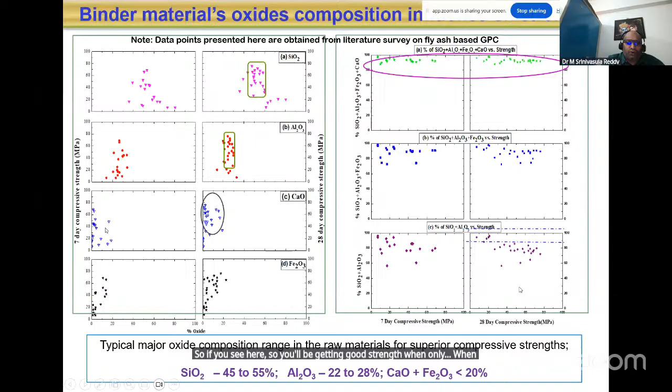This is the general procedure, so I will not go too deep. The optimum ratio generally varies with the type of binder material you are using, with the presence of silica oxide composition, aluminum oxide, and calcium. This may vary from material to material, so you should not blindly go with these ratios.

Many research papers will say follow this molarity and follow this ratio - you should not go like that. You have to do at least trial tests, not on a large scale. At least do it on small mortar cubes, for 7 days and 28 days, for each ratio, using the material you are using, since this may vary depending on the material. So both you have to try - at least fix one molarity, then try which one gives the maximum optimum.

Instead of repeatedly testing 8 and 1, 10 and 1, 14 and 1, 16 and 1, it is better to optimize one parameter first. Like I found the optimum ratio, then fixed that and tried with different molarities. This may vary for each and every type of material being used, so it is better to do this type of test.

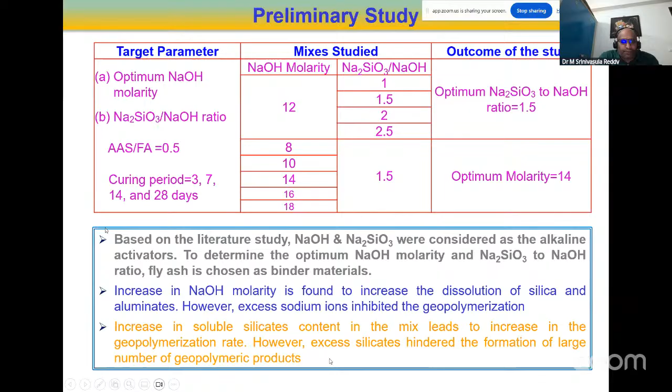This is for finalizing the optimum - we can say fly ash and red mud combination, fly ash and GGBS combination. Actually, in the starting I tried with fly ash alone, fly ash and GGBS, fly ash, GGBS and red mud. Before that, I also tried fly ash and red mud.

Suppose you are taking 100% fly ash and getting some X amount of compressive strength. If I'm adding red mud 5%, 10%, 15%, keeping other things constant, I observed a drastic reduction in the strength properties. That means we cannot use this combination, because in red mud we don't have - at least in GGBS we have a reasonable amount of calcium oxide.

Because of that, in addition to geopolymerization, we are also getting CSH gel and CASH - calcium is also forming CASH. That is giving strength to fly ash and GGBS. Whereas in fly ash and red mud, the red mud is mostly aluminum and iron oxide, so that will not contribute much to the strength of the geopolymer concrete.

So with the addition of red mud to fly ash, I noticed a decrease in strength, so we can discard this combination of fly ash and red mud, at least for developing geopolymer concrete. Next, this is the most common - many people are even using this combination of fly ash and GGBS practically for roads, for airports, and in some other places.

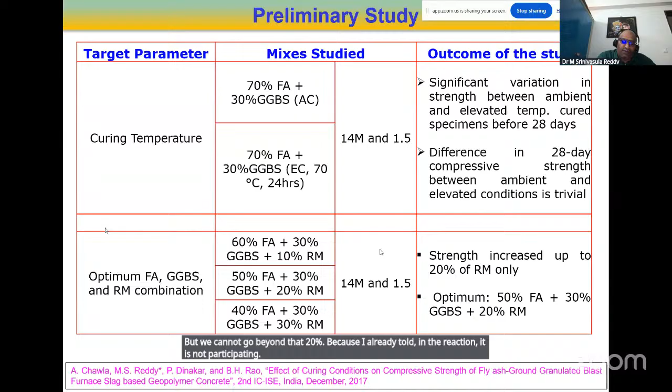And actually this research I have done is sponsored by NALCO, which is in Odisha.

I don't know what type of super plasticizers are there in the market nowadays, but during that time naphthalene was the only option for me. Even I tried with PC based, but that was even retarding the strength.

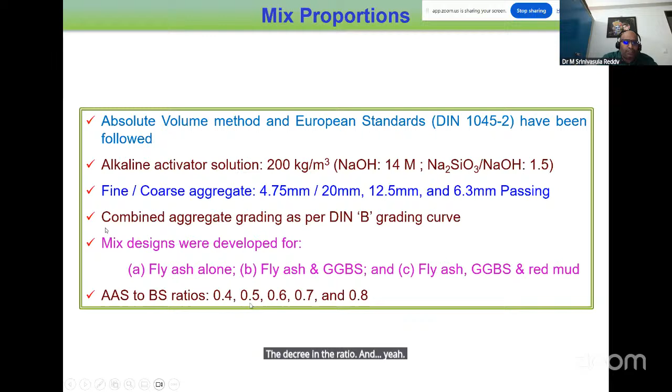So the first thing is fixing the total alkali activator content, then fixing the NaOH molarity. This step has to be followed by everyone developing geopolymer concrete, because the material will be different from place to place. This is valid not only for fly ash and GGBS but for any material which contains a good amount of silicates and aluminates - and if calcium is also there, that will even help in the formation of C-A-S-H, which gives very good strength.

This procedure can be applied to any type of geopolymer. The only thing is these two steps you have to do: preliminary study to fix the molarity and fix the ratio. The total AAS may change or may not change depending on the material used. So these two steps everyone has to do.

Even if I'm doing the same procedure in a different location - similar to how for normal concrete mix design we test the aggregates and materials we are using - likewise, we have to consider these two tests as common tests for geopolymer concrete: fixing the total AAS requirement and fixing the molarity and sodium silicate to sodium hydroxide ratio. You should not blindly follow what some research says is optimum - that may be optimum only for the material used by them. So it varies.

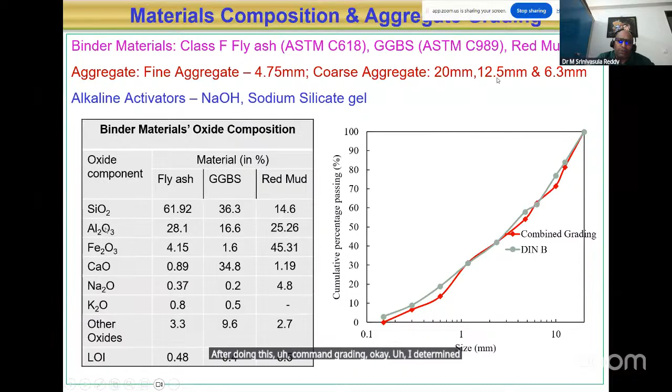To match this curve, how much percentage of 20mm passing I used, how much percentage of 12.5mm I used, how much percentage of 6.3mm I used, I already know. After doing the sieve analysis and combined grading, I determined how much percentage of each. This may vary from location to location - so say I got A percent, B percent, C percent, D percent.

So to determine the weight of aggregate passing this much, take the percentage of 4.75 passing into volume - this VTCA, total aggregate volume - into specific gravity of this 4.75, into 1000. So we will be getting in terms of kg the weight of 4.75 passing aggregate, likewise for 6.3mm, 12.5mm and 20mm.

Then once you get all this, you have to do the proper mixing and sequential mixing, what I told - first mix the dry material, then add the sodium silicate, then add the sodium hydroxide.

So this is the mix design for various combinations. Fly ash alone at ratios 0.4, 0.5, 0.6, 0.7, 0.8 - this ratio being alkali activator content to binder solids. Similarly for fly ash and GGBS: fly ash 70%, GGBS 30%. Here fly ash 100%. Here fly ash 50%, GGBS 30%, red mud 20%. So for all these ratios, 0.4 to 0.8, this is the fly ash.

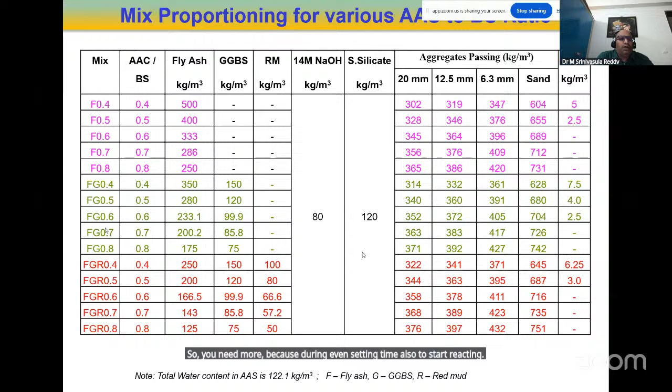So these are the tests conducted - compressive strength. All done on 100 by 100 cubes only, up to 56 days: 3, 7, 14, 28, and 56 days. Split tensile, flexural, elastic modulus, rebound hammer, ultrasonic pulse velocity, water absorption, sorptivity, water penetration, sulfate attack, acid attack, corrosion properties, pH or alkalinity, carbonation, chloride ion content, surface resistivity, half cell potential, corrosion rate, then microstructure - we see SEM and EDS analysis, XRD, FTIR, and TGA - thermogravimetric analysis. And this is the fresh properties.

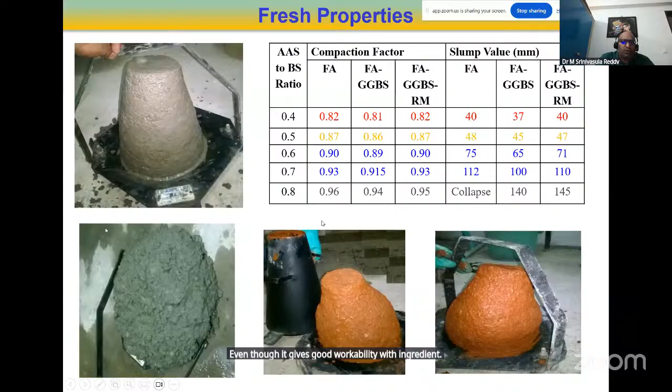So the main reaction product in the fly ash based system is N-A-S-H, sodium aluminosilicate hydrate. Increase in liquid content inhibits the geopolymerization - that's the reason with increase in the ratio it inhibits geopolymerization, since fly ash based geopolymers usually depend mainly on the formation of N-A-S-H.

That will inhibit the formation of NaSH. That's why with the increase in the ratio, the strength is constantly reducing. Then why we got more strength with addition of GGBS is, in addition to NaSH, we are also having CSH.

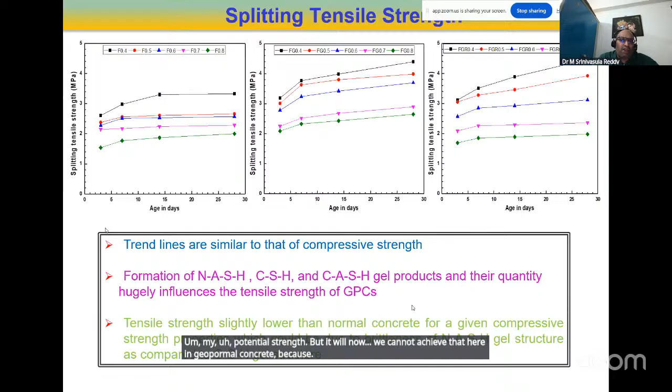This is because of the brittleness - compared to CSH gel, NaSH gel is brittle in nature. So because of the brittleness, for tensile strength, we cannot directly take the rough estimate of 10% of the compressive strength as the split tensile strength; we cannot achieve that here in geopolymer concrete, because that is not valid here. Even for flexural strength, where we generally use 0.7 root FCK, if you use the same empirical equation, it will not suit geopolymer concrete.

You will get lesser values, because the liquid content in the mix and age of curing seems to have an influence. And elastic modulus also, obviously it will be lower, because your flexure and tensile properties also are not similar to normal concrete.

This is when we compare with compressive strength. So here also you can see elastic modulus, you may not have 5000 root FCK. That empirical equation may not be valid, it's for cross check only. It may not be valid for geopolymer concrete, because it will exhibit lesser elastic modulus because of the brittle nature of the geopolymer structure.

I found only for lower A-S to B-S ratio concretes, like 0.4, that the concrete quality is excellent. Based on ultrasonic pulse velocity, I found it's more than 4.5, and we can observe for 0.4 ratio only, for GGBS and GGBS red mud combination, fly ash GGBS red mud combination only, it is showing that. But overall we can say, except fly ash GGBS and red mud per 0.8 ratio, all are showing fair to excellent quality concrete. So you can see less pores, in that you can see that.

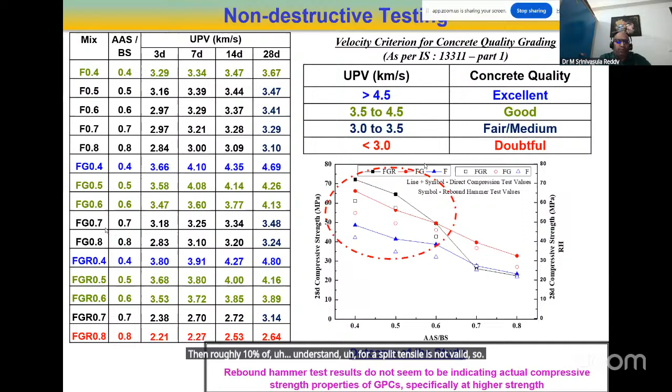Even this compressive strength one also, you should do more tests. Then only we can develop a better regression curve, strength versus A to BS curve. So I prefer that there is more work to be done on this geopolymer concrete with respect to the empirical equation point of view. If we say 0.7 root FCK, 5000 root FCK for elastic modulus, then roughly 10% of compressive strength for split tensile is not valid. So there should be more research to be done on this, and they need to develop it.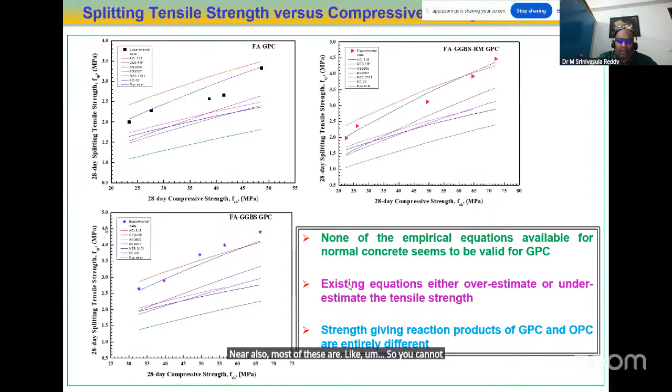You can see only for flexure, some countries show above value and some below, but no one is closer. Only the British and Asia codes are just near also, most of these are off. So we cannot directly rely on existing empirical equations, that is what I want to say.

Next is durability, sorptivity. Obviously with increase in the A-S to B-S ratio, the sorptivity will be more, it will absorb more water. I have done sorptivity test as per ASTM C1585, and this is the trend you can observe. The increase in sorptivity indicates presence of more capillary pores in the matrix, that is the obvious reason. So more sorptivity means it is sucking more water because of the continuity of pores.

This sorptivity mainly depends on continuity. The more continuous the pores, the more will be the sorptivity. So if there is dense concrete with a break in continuity, or discontinuity of pores, even though the amount of pores may be same as voids, if you measure the voids, the same amount of voids in one cube may give more sorptivity while the other gives less. That purely depends on the connectivity of the pores.

So you can see that with increasing AS to BS ratio, obviously the pores will be more, so the sorptivity also shows the same trend. And one more thing, IS code says if it is less than 0.98, we cannot bring any correlation between compressive strength and sorptivity. That's why I have not done any correlation.

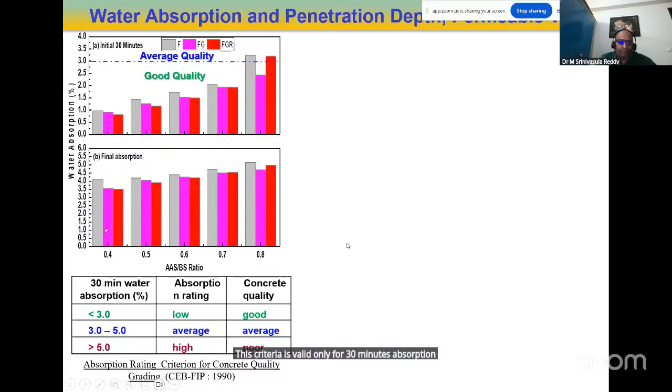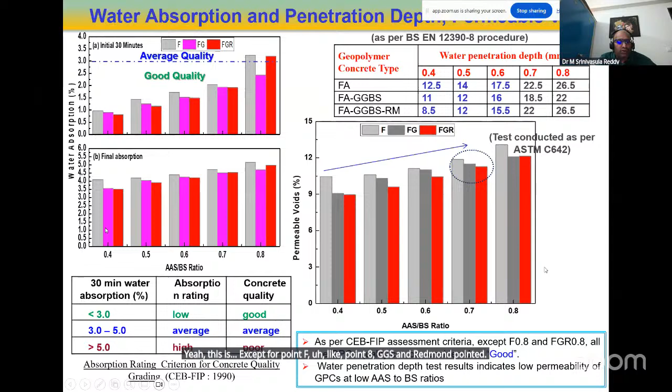Then there is a good correlation between various parameters. We can say R value 0.97, 0.96. So we can consider this correlation as a good correlation.

So you can see voids and final water absorption - if you have permeable voids and final water absorption, it is giving a linear correlation, meaning with increasing permeable voids, water absorption is increasing. Also comparing water absorption to water penetration depth, it shows the same trend - increasing water absorption means increase in water penetration depth. And finally sorptivity and water penetration also have a correlation, because more water penetrating means there is continuity of pores, that's why water is able to penetrate that far. So we can say permeable voids influence the water absorption. This linear relation indicates a good correlation between sorptivity, water penetration, water absorption with the capillary pores.

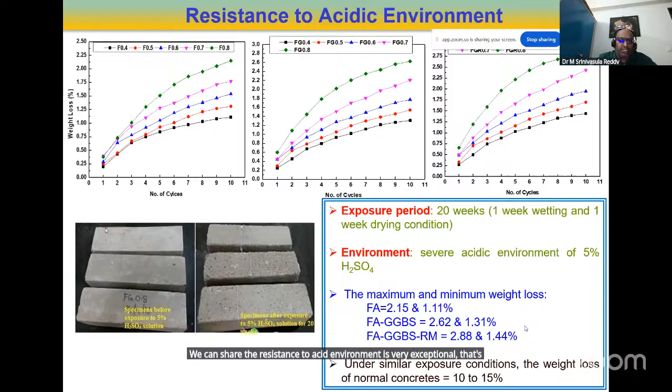Under similar exposure condition, the weight loss of normal concrete will be 10 to 15%. So we can say the resistance to acid environment is exceptional, not just very good - exceptional for these geopolymer concretes. Then sulfates also.

You can say here weight gain is not that much, you can even ignore this. It's like minimum, and that is more when the ratio is more, because of more porous nature, it will acquire pores and whatever sulfates we exposed these cubes to. That may be the reason for the slight increase. But overall, if you see, this is starting only color changed, but you can see even same members, only color changed, and there is not much expansion, and little bit of weight gain is there.

That is maybe due to formation of ettringite. If more formation of ettringite is there, that will disintegrate the binder material from the aggregate, and that will lead to loss of strength and loss of material. Here that is not happening, it's very minimum. Because of this very minimum absorption, instead of reducing, it is losing weight - sorry, we notice increase in the weight, because it's not expanding hugely, it's negligible expansion, and sulfates are going into the small pores on the surface, giving little bit of weight gain. So overall, there is not much effect on the concrete.

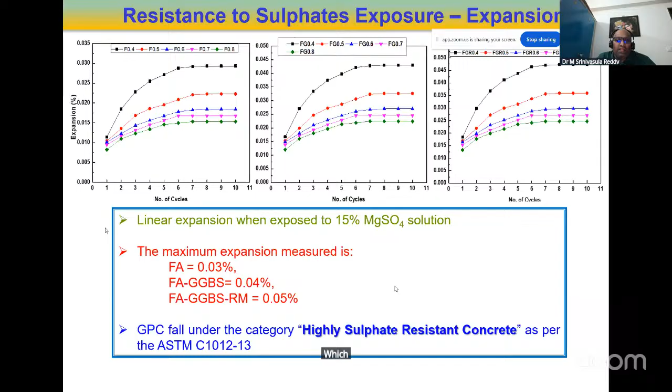I think okay, time is there. Then next is the alkalinity and carbonation studies.

So you know that Na2O content and OH mass concentration increases with the AS to BS ratio. Because of that, the pH also will increase, because of this hydroxyl ion presence, and this content increasing. So we can notice this: with increase in the AS to BS ratio, even the pH value also increases, because the alkalinity is increasing, mainly because of the presence of sodium oxide and hydroxyl ions. If we notice, it is a good indication - it will give good resistance to corrosion of steel, because everything is above 12 pH, nothing is below 12. So all geopolymer concretes having good alkalinity, it will be good for corrosion resistance also.

And this is the carbonation studies. We can see almost nil carbonation in fly ash alone based geopolymer concretes, because hardly we have 4 to 5% of calcium oxide in the fly ash we are using. Whereas with fly ash GGBS and fly ash GGBS red mud, you can notice little bit of carbonation taken place compared to only fly ash alone. You can see here, this is fly ash alone - everything is, so there is no color, meaning no reaction taken place. Color indication means it's not reactive. As I already told, because of low calcium content, fly ash alone is the least affected carbonation-wise.

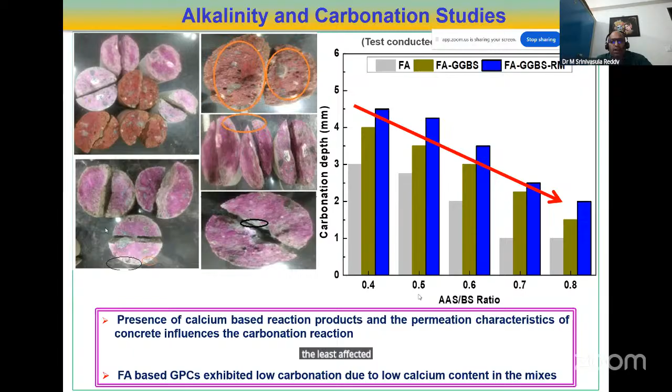Then chloride ion penetration - obviously with increasing the porous nature of the concrete, this chloride ion penetration also will increase. We can notice this. And in every case, we can notice with increasing the AS to BS ratio, the chloride ion penetration also is increasing.

And resistivity - they are showing very good resistivity, and this resistivity we can link to the porosity. High porous concretes are showing, you can see here, lower resistivity values - resistivity value less means we can see the porous nature, more porous means the value will be less. So this is low, moderate, high.

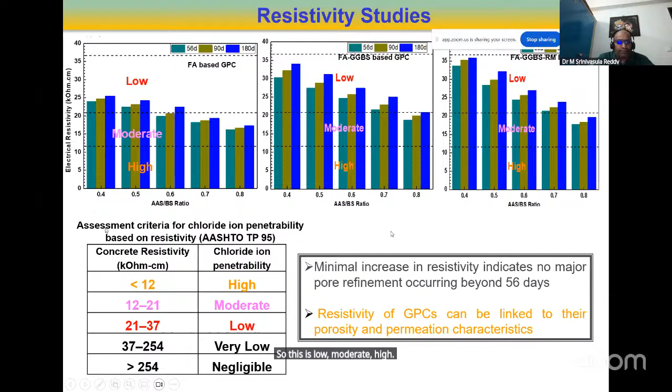Then half-cell potential - same, we can notice the same trend. Then corrosion rates - corrosion is also increasing with the increasing AS to BS ratio. We can observe least affected is the concretes with low AS to BS ratio, and highly affected is the concretes with higher ratio. But everything, maximum is nothing abnormal - everything is below intermediate, moderate, and we can say negligible also. For fly ash and fly ash GGBS, I noticed negligible corrosion. Then intermediate, moderate to intermediate when the ratio is 0.6, 0.7 and 0.8. But if it is 0.5 or 0.4, below 0.5, you will be having very low and negligible corrosion effect.

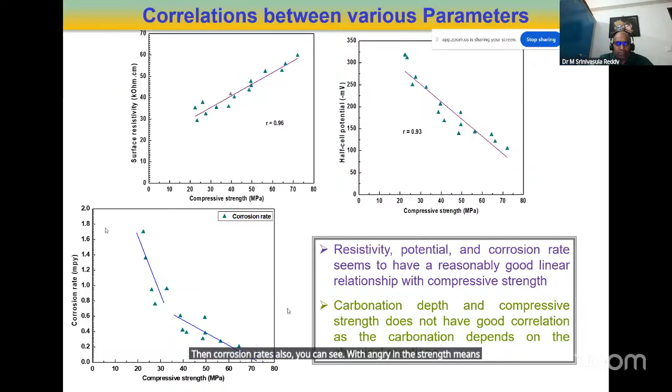This corrosion again depends on the permeation, as all you people know - this permeation usually influences the corrosion behavior. Relation, you can see surface resistivity - higher the concrete strength, higher the surface resistivity, and lower will be the half-cell potential. It is vice versa - if more resistive means less, the potential will be less. Then corrosion rates also - with increase in the strength, meaning at low water to AS to BS ratio concrete, the corrosion rate will be less.

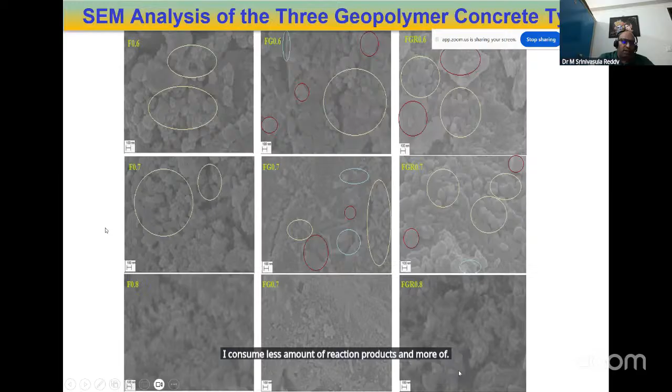So if we go on increasing the ratios, we can see a lesser amount of reaction products and more unreacted particles, and more porous nature.

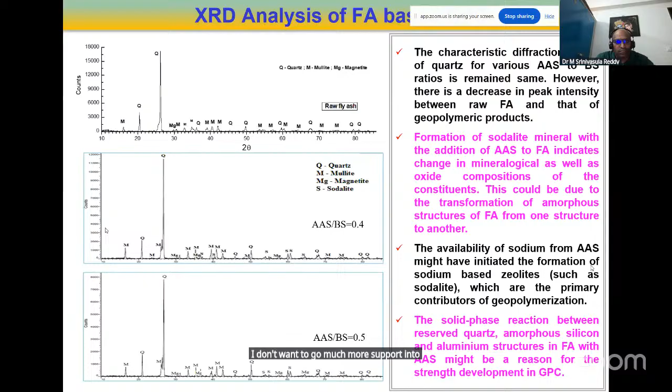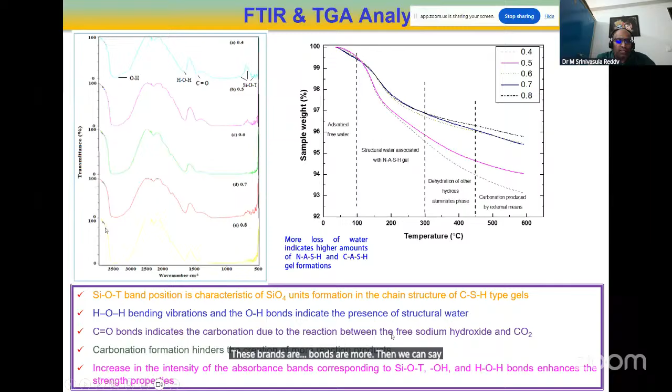Increase in the intensity of absorption bands corresponding to Si-O-T, OH, and HOH bonds enhances the strength properties. If these three bonds are more, then we can say the strength properties will also be good. This is the same for different concretes.

In TGA, you can notice weight loss between 105 to 300 degrees centigrade, which corresponds to the loss of structurally bound water associated with NASH gel and CASH gels. One of the reasons for this greater weight loss could be due to the loss of structurally bound water associated with NASH gel and CASH gel.

This observation is in good agreement with the results reported by Nedeljkovic, who clearly reported that total mass loss in each sample is from interlayer and structurally bound water, either in NASH or CASH gel, within the temperature range of 105 to 400. The precise effects of weight loss on the strength characteristics cannot be quantified based on the TGA.

So we can just notice a huge loss in this region means there is a formation of NASH happening. Huge loss means there is a huge loss of water from the NASH gel formation. Less water loss means less NASH formation; more water loss means more NASH formation.

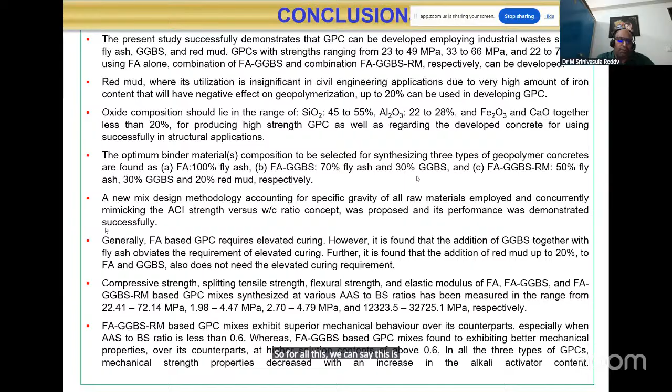Yeah, that's all from me.